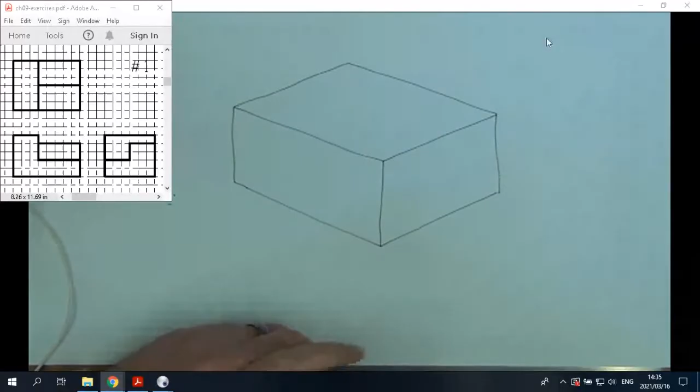So, isometric sketches exercise 1, number 1. I drew the block and now I'm going to cut out the top portion of this block. So it should be slightly more than halfway. Something like that.

Now, obviously, if you can see what the final part should look like in the isometric, then you don't have to go and do this whole cutaway method. This is just for people who are battling to see what it should look like. Okay, so there I removed that little step.

Now, if we view the right-hand side, we can see there's a 3 wide, 2 high block cut out here as well. But now the question is, how deep is this cutout? So to get that information, I have to go to the other views. So if I go to my main view, if this cutout is over here, it can stop against this vertical line over here.

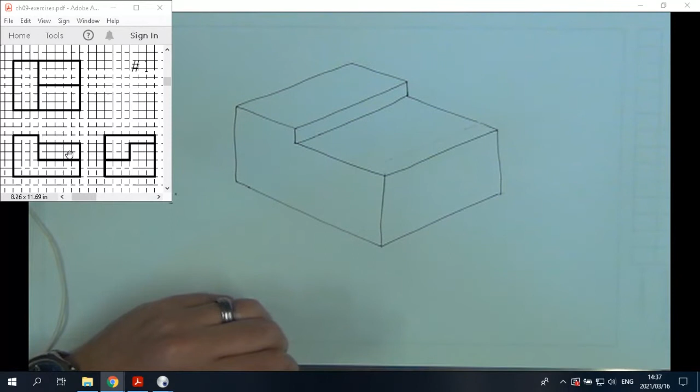I can also use the top view to see how deep this cutout goes to the back. If it was stopping anywhere other than that line, I would have another edge or line visible in my main view. So this block is cut out all the way to the end over here.

So the question now was, does the first edition and second edition have the same exercises in the drawings? Yes, they do have the same exercises.

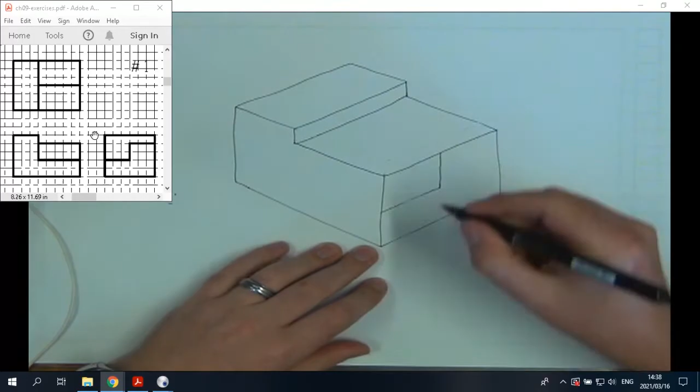Okay, so next we're going from this line's middle, somewhere there, going down 2 blocks, to the side 3 blocks. Now I'm just going to erase all the stuff that I don't need anymore.

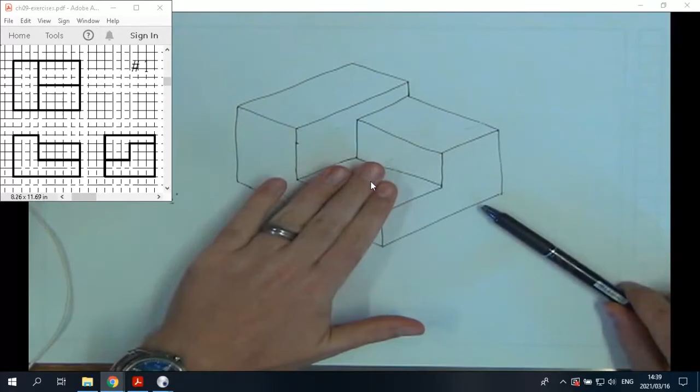Okay, so let us reflect and see if it makes sense. So this flat plane of mine, if I view it here from the right hand side, then that whole flat plane just becomes a straight line. If I can show it to you, like there's a cell phone and the top is a reasonably flat plane.

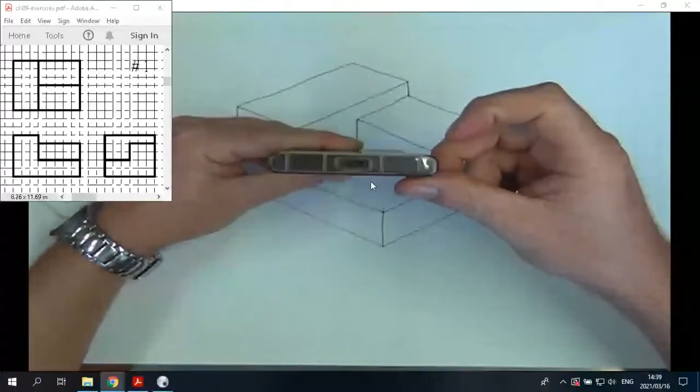Now, if you view a flat plane directly from the side, this top surface now from a flat plane simply becomes a straight line. So that's why this flat plane of ours, if we view it here from the bottom right hand side, it is simply represented by that line in the right hand view over there.

So if I tilt the flat line and view it straight from the side, then the surface just becomes a straight line.

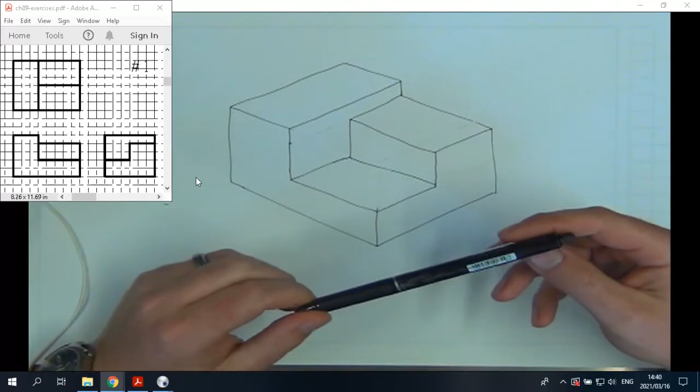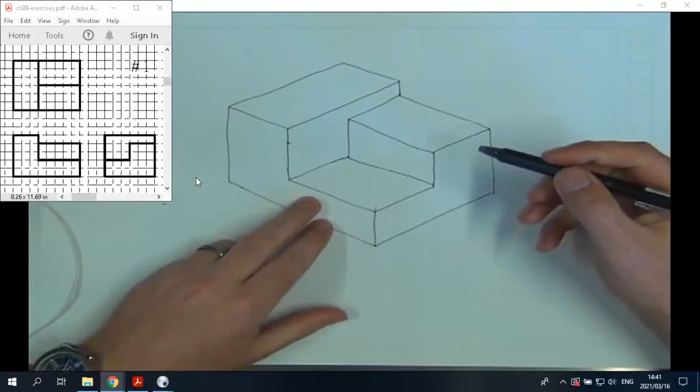Okay, so from the top, this rectangle will be represented by that rectangle over there. This next rectangle, that one there, from the top will be represented by that little rectangle over there. This big rectangle over there in my top view is then just that one there.

I'm glad you came right. So it seems refreshing does work.

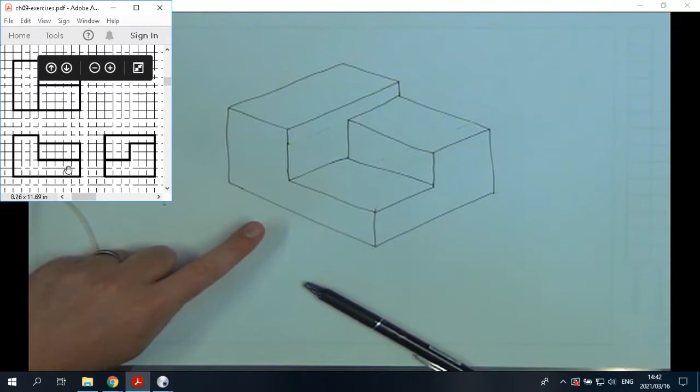Good. If we view it here from the front, the first thing we encounter is this L shape over there. So in my front view over here, we see the L shape. And then as we move further back from there, we get this rectangle over there, which is in my isometric view, it's that one over there.

So now we can see that this isometric drawing of mine does actually correspond to that orthographic sketch in the question. So this is then the answer to this problem. I'll leave it on there like that for another minute for the students who want to copy it down to be able to do so.

Okay, that's a good question. What speed should you do an isometric at in a test environment? So typically a semester test in MGC will be a 3-hour long session where probably a quarter of the time can be spent on the isometric drawing if you proportion the time and the marks linearly. So a quarter of 3 hours would then be 3/4 of an hour.

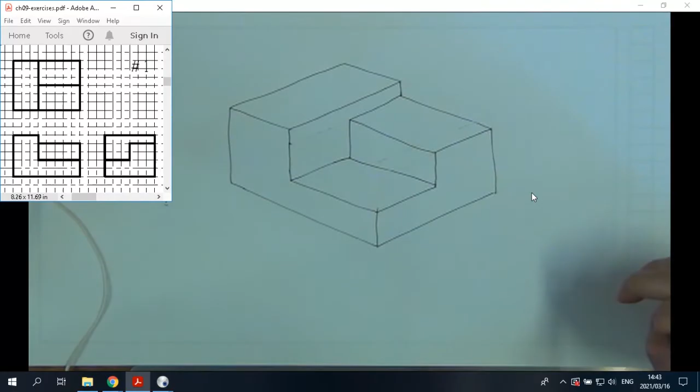So for the first semester test, if you do half an hour on the isometric, you'll be fine. What about center lines? So this drawing does not have any center lines because there aren't any arcs or radii in it. So this one looks just like that.

Okay, the next one is exercise 1, number 3.

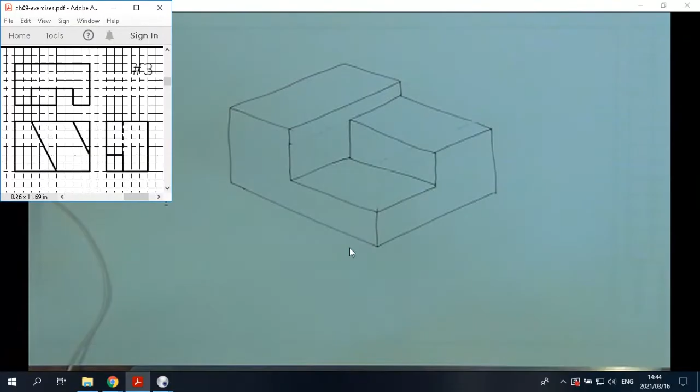Good, isometric sketches, exercise 1, number 3. This time we have a main view, a right-hand view, and a top view again. Main view has a height of 1, 2, 3, 4, 5, 6 blocks, and a length of 1, 2, 3, 4, 5, 6, 7, 8, 9 blocks. So it's about 1.5 times as long as what it is high. The right-hand view has the same height of 6 blocks and a width of 1, 2, 3, 4, 5 blocks.

The next question was, should you use different colored lines? Please don't. We just get pencils in kind of like a dark grayish black color. Don't use other color pencils, please.

Okay, next one is this one. Let's see if we can quickly draw it. So we have a view on this side that's more or less 30 degrees. There I have my isometric box. Next thing we need to do is we need to try and figure out what this thing would look like.

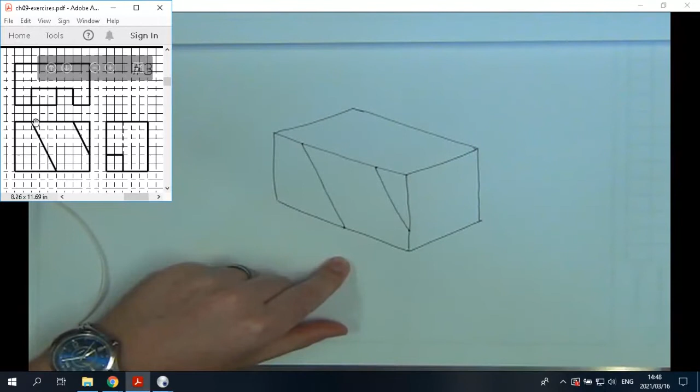Then in my top view, I saw that this corner has a line going to the back. That would be that line over there. Line to the back. With a length of 2 blocks. So just something for interest, if that is 2 blocks and that is 2 blocks, then it means that this point must be directly above that point.

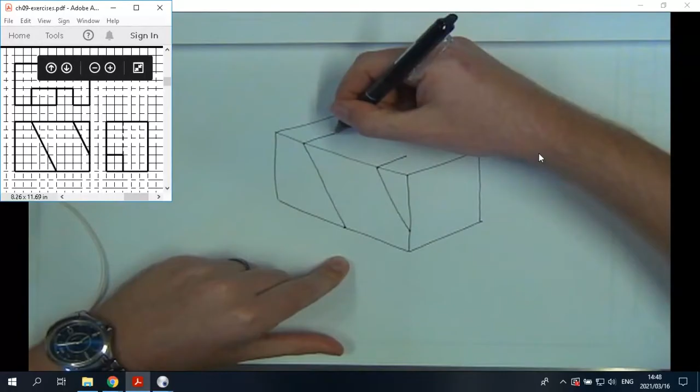Then I've got a straight line from that corner to that corner. Straight line from there to there. Good. Then I also saw that there's a straight line going back 2 blocks from this corner, so something like that. And now I'm kind of stuck with the information of the main view. I have to now use information from the other views.

So from my right-hand view, I can see that there's a little 2x2 box that either is protruding out or is cut in. So that corner over there lines up with that corner caused by that line there, which means it can look something like that. So there's the 2x2 box that is cut away. So now I'm just going to erase the stuff that I don't want there anymore.

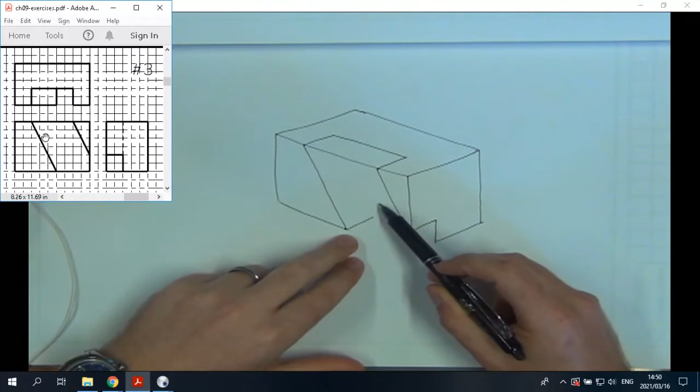Okay, good. Now we need to finish this drawing so that it makes sense. So I have somewhat a flat plane over here, but at the moment my flat plane isn't completely sketched because it's open on the one side. So if I view in my top, I've got this little rectangle over there that is 2 blocks deep from the top line to the bottom line. So 2 blocks deep. From the top line to the bottom line.

And then we also have this plane over here, which is this one in my main view, which at the moment isn't completely drawn yet because it is still open at the bottom. So to close that off, I need to do that. And that is basically the isometric drawing in this question.

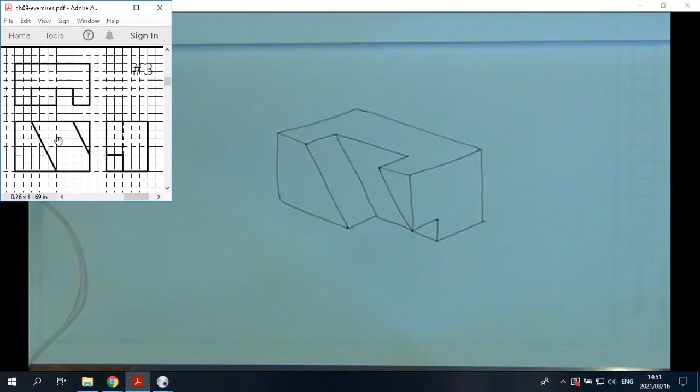Let's have a look. If we approach it from this bottom left-hand side, we have this shape over there, which then corresponds to this shape here in my main view. Over here we have the little triangle like that, which then corresponds to that triangle over there.

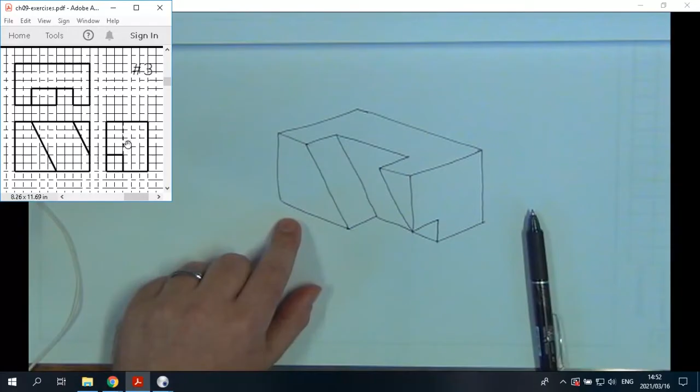If we move it a little bit further back, we have this shape over here, which goes from there to there, to there, to there, to there, which corresponds to this shape over here. And if you look very carefully, you'll see that there's a dashed line over there. Let me zoom in a little bit for you.

So that dashed line represents somewhat the plane which is behind the part that I'm looking at, which is basically this flat plane that lies behind this edge over here. So the dashed line represents the hidden detail of this flat plane.

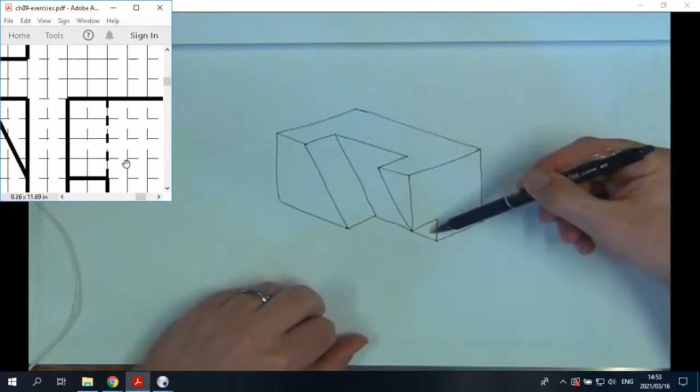Good. Oh snap, I shouldn't have clicked there. There we go. Okay, so

The question says, did you take into account the solid line on the top view? The top view, I'm not sure what solid line you are referring to. But basically, this plane over here is represented by that line over there.

Okay, I'll leave this one on there for another minute or so for the people who are still busy drawing it so that they can complete the drawing.

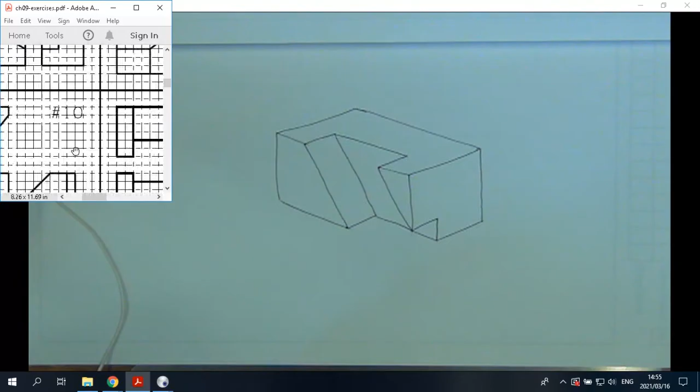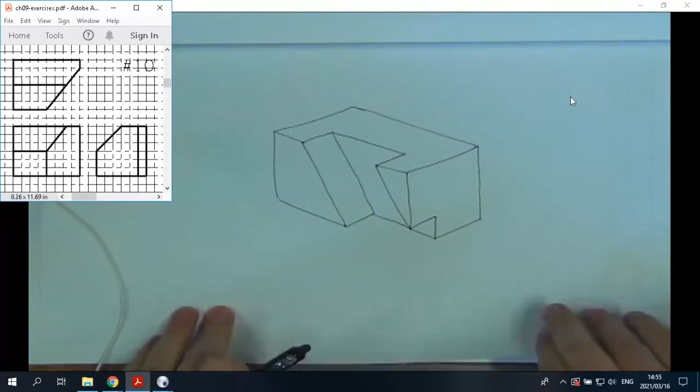Okay, so the next one we are going to have a look at is exercise 1, number 10. So isometric sketches exercise 1, number 10. We have 3 views given. There's a right-hand view, there's a top view, there would be the main view. And in my top view, I have this bottom triangle cut away. In my right-hand view, this top left triangle is cut away.

The length is 1, 2, 3, 4, 5, 6, 7, 8 blocks long, 6 blocks high, 6 blocks deep. So the right-hand view is a square, this view is not a square. Okay, something like that. That's our box. And now we can start to remove material.

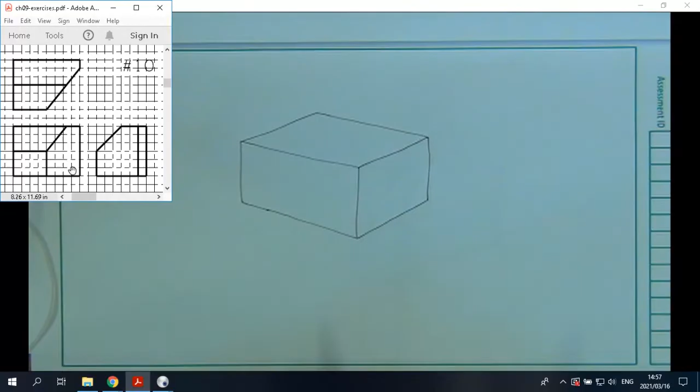So I'm going to start by removing this bottom corner in my top view, that one over there. So it starts 1 block from there and is about halfway in that line. Okay, something like that.

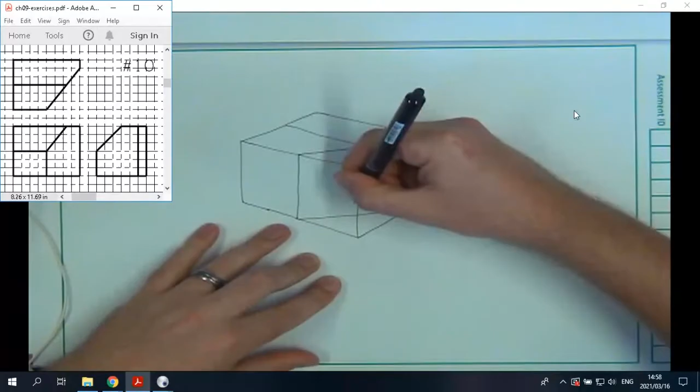Next thing that I'm going to do is I'm going to remove that triangle from my right-hand view, the top left triangle, which is 3 by 3, so it's middle of that one to the middle of that one. Something like that. Now for the slightly more tricky part. I'm going to erase the construction lines there.

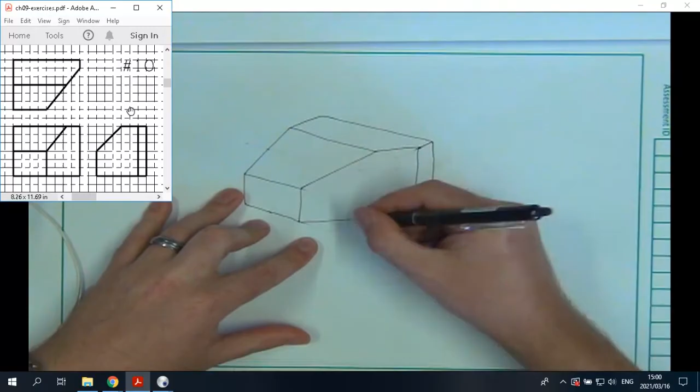Okay, so now for the tricky part that I mentioned. This plane over here is flat because that line in my top here is a straight line. So that means it cannot have this weird shape over there. It should just have a straight line from that corner down to that corner. You can see there it is a straight line. So it should have a straight line from this corner to this corner. Something like that.

So if we now approach this drawing here from the bottom left, the first thing we meet is this rectangle that is 4 blocks by 3 blocks. Then if we go slightly behind that, at the top we have a block that is 3 at the bottom and more at the top. About 6.5 at the top. To the right of that, we've got one that is 3 at the front and full height at the back.

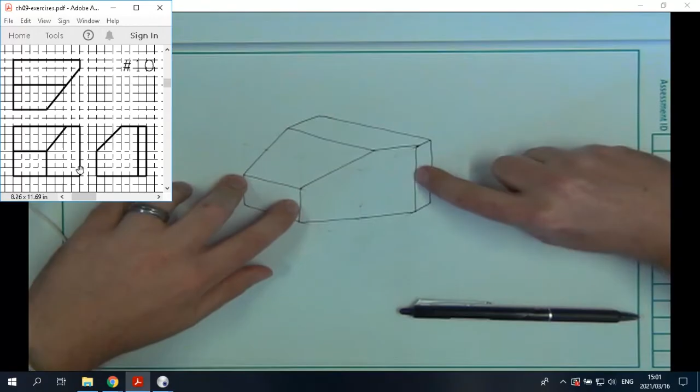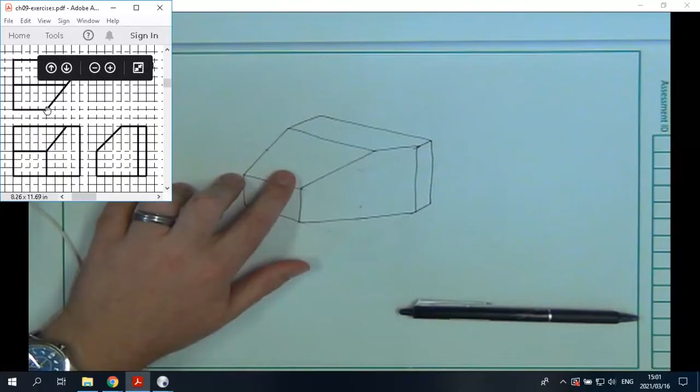And this one is the first one we see from the top. If we go down from the top, the second thing we see would be that face over there, which is this one. This entire face would not be visible from the top. It would just be a straight line. That straight line there. And then from the right-hand side, the first thing we meet is this slender rectangle. And behind that, this shape over here.

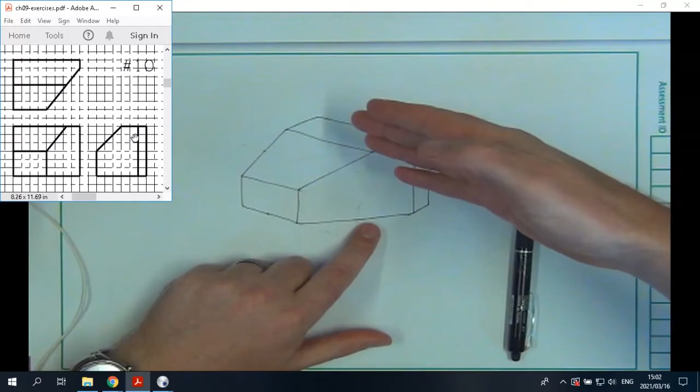Now the reason why this line seems longer than the 2 blocks given in my right-hand view is because it is actually going into the page. Meaning, if this is my pen's length, if I turn the pen, it actually looks like a shorter pen because I'm not looking straight at it. So this line is longer than 2 blocks in reality, although if you view it from the specific angle, it only looks 2 blocks long.

Okay, I'll leave this one on there for another minute for the people to copy it down.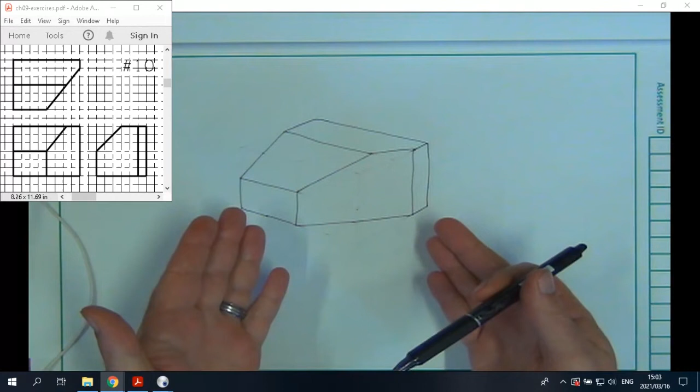So there's a question now on where can you find the memorandums for all of these questions. So you won't be able to find the memorandum for all of the exercises in the book because then we can't use the book anymore. It's basically just discussed in class.

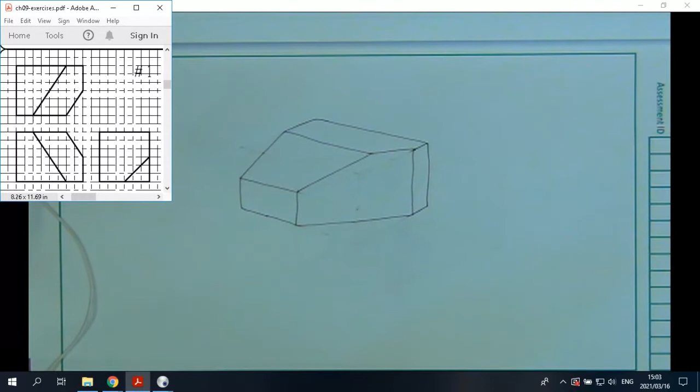I see someone has raised a hand. You're welcome to ask a question by typing it in the chat box.

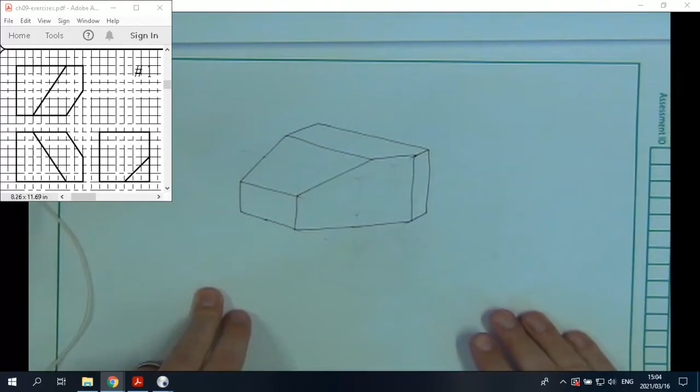Good. So the next one we're going to have a look at is isometric exercise 2, number 1. So exercise 2, number 1. We're given a part that is 1, 2, 3, 4, 5, 6, 7, 8 long, 1, 2, 3, 4, 5, 6 high, and 6 deep as well. So let's quickly construct the box.

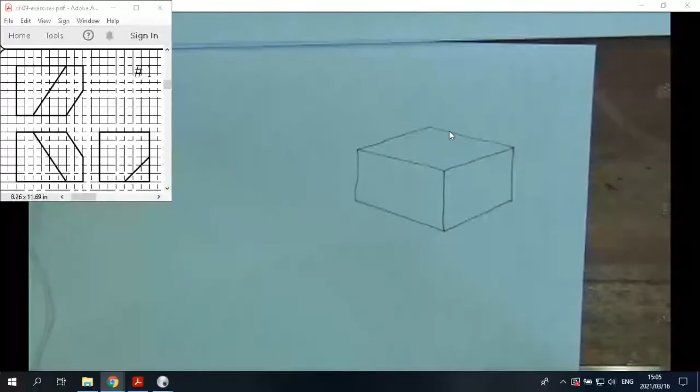So there we have the box. And now this one is a little bit more tricky than the previous ones because we can use a cutaway method, but the cutaway is at a very weird angle, which makes it very hard for us to do that slanted cutaway. So I'm going to show you another method in which you can construct these weird surfaces.

So I'm not sure how to answer the question about the curve like a building wall. That plane on the right hand side is basically straight for the previous question.

Okay, so with this one, what I'm going to do now is I'm going to sketch what I have available, and then I'm going to use that to construct this weird shape over here. So first thing to do would be to identify corners that match with each other. So find a point in one view and find its location in the other views as well.

So for isometric drawings, we're not going to do auxiliary views. This is just a single 3D view. Auxiliary views would be helpful later on if you want to know the true shape of that weird surface. But we're going to do that in auxiliary views that we do in about 3 weeks' time.

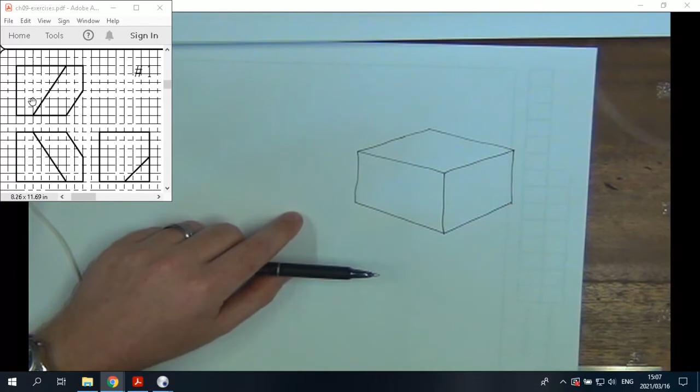So let's start with a corner. I'm going to start with that corner over there. That corner in my other views, basically what I'm looking for is any intersections or kinks in lines. So if I project this one upwards, the only one that intersects with that projected line is this corner over there.

Just for ease, I am going to quickly draw the question over as well. And this view will now nicely crash into this view. So I'm just going to do it slightly higher. Snap. Bad planning, guys. Okay, something like that. So there I just quickly copied over the views.

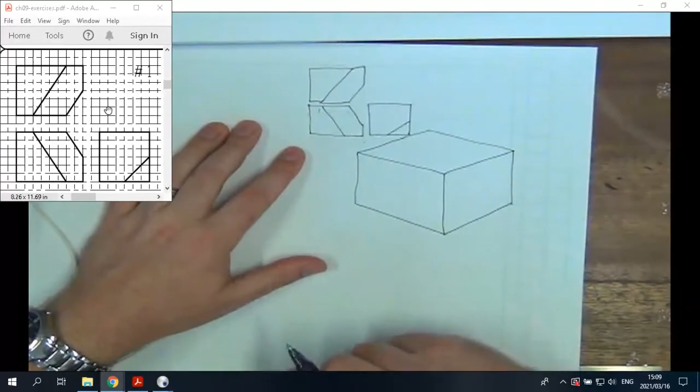So if I start with this point, let's give it a number. Point number 1. If I look at my top view, I must try to figure out where point number 1 can lie. The only place that lines up with this line projected upwards is this corner over here. So that's point number 1 in my top view.

Point number 2 here at the bottom. If I project it upwards, the only place that can line up with that is, well, now I have 2 options. It can be that one or that one. So for that, I'm going to use my right-hand view as well. Point number 2 to the right can lie over there, or over there.

So if I now look at these 3 points and these 2 points, I need to figure out which of these could actually be point number 2. So point number 2 has to lie somewhere on the ground. This point, however, is somewhere in the air. It's at the top there. So this one cannot be point number 2. That one has to be point number 2.

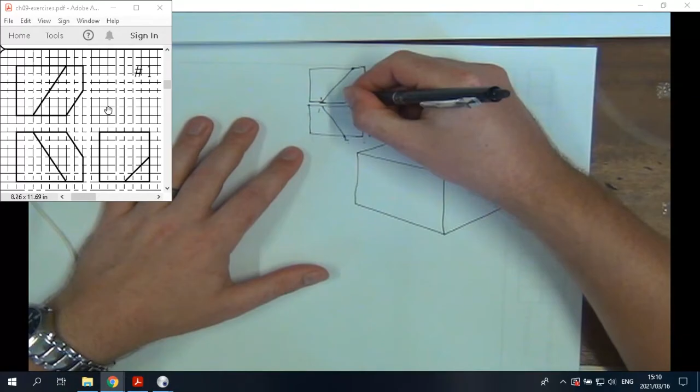Then let's do point number 3. Point number 3 in my top view can only line up with that corner or the bottom one. Now I'll have to go to my right-hand view to figure out which of those it can be. There's a trick with orthographic projection. It's not too serious for you to understand it right now. We are going to do it in next week's lecture as well.

Point number 3 in my right-hand view can only be the one on the ground. So that means point number 3, I said could be that one or that one. In reality, it can only be the one on the ground. Okay.

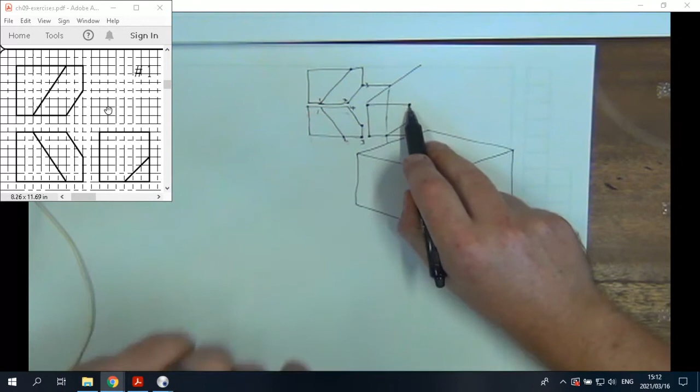Let's call that point number 4. In my right-hand view, point number 4 could line up with that corner, or it could line up with that corner. So it's hard to say from my right-hand view only. If I take it to the top, point number 4 can be there or there. So one of these two or one of those two, there can only be one answer there.

Previously, we said that this point number 2 lies on the ground. So the only other option for point number 4 would be that one there, because this point 4 definitely does not lie on the ground. Okay, so that's point number 4.

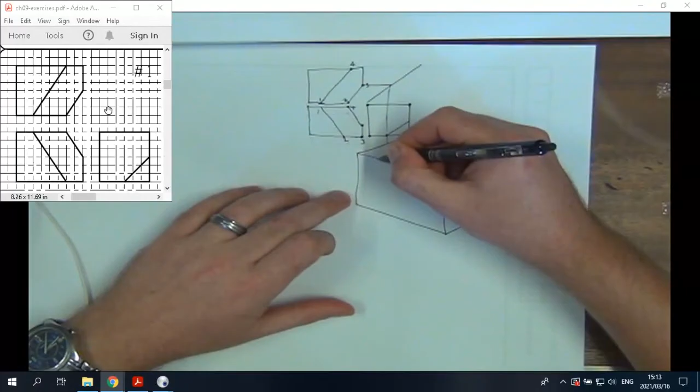Now I'm just going to transfer these points over to my isometric view. Point number 1 from my main view lies over there. From my top view, point number 1 lies on the same place, 2 blocks from the side. Point number 2 in my main view lies over there. From my top view, it is 2 blocks from the side.

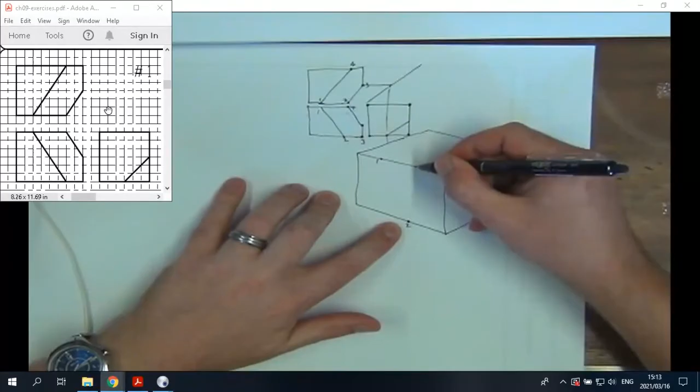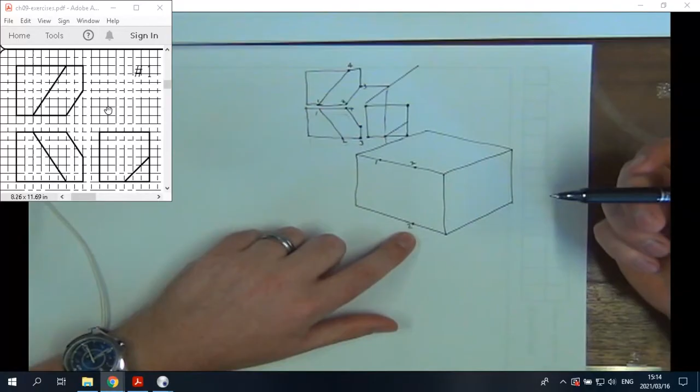Two blocks from the side. Now the question is, which one of those is point number 2? And I usually explain this by referring to a fish tank. I always use this fish tank example. Basically, if you're at an aquarium and you're looking at a fish tank, and we have some other fish in there.

Now we can measure the distance that the fish is from the bottom of the tank, and we can measure how far it is from the side of the tank by just looking at the tank from the front. But what we can't see is how deep this fish is into the tank. So basically how close it is to the window or how close it is to the back of the tank. The only way in which you can get this information is actually by walking to the side of the tank and looking at the side of the tank.

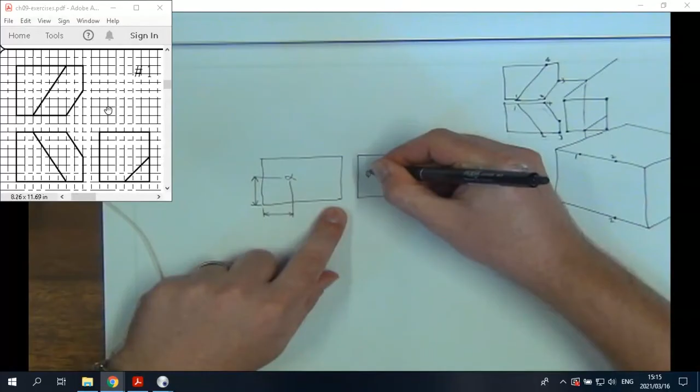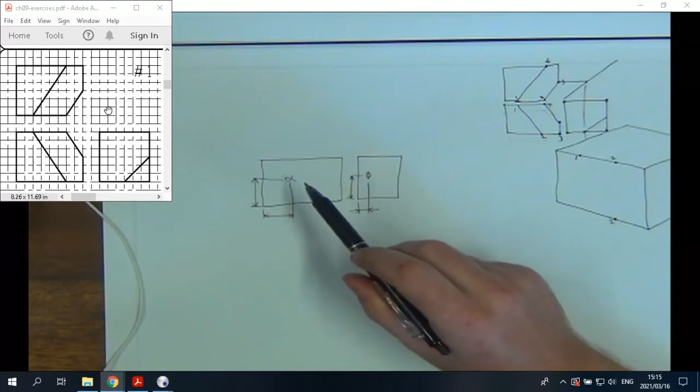And only now can we see how far this little fish is from the front window. Okay, and remember the height from the bottom will still be the same as the other one. So basically what I can do is, if I want to draw this fish tank in 3D, like an isometric view, and I want to find the location of this fish in 3D, I can draw the tank.

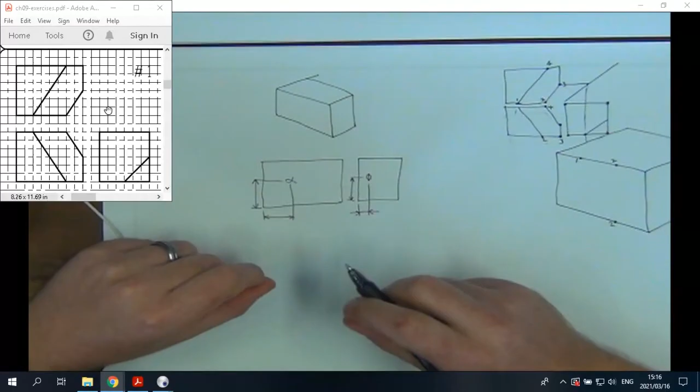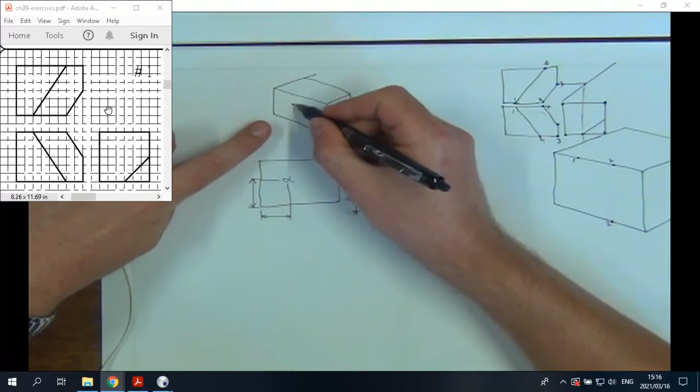And then what I can do is I can project the position where this fish should be in my isometric by taking the point on the main view, the distance from the side, the distance from the bottom, taking that point, and basically saying that the fish from this view looks like it is there, but I cannot judge how far into the tank it is. So it can be anywhere located on that line, because from this one direction, you don't have that information.

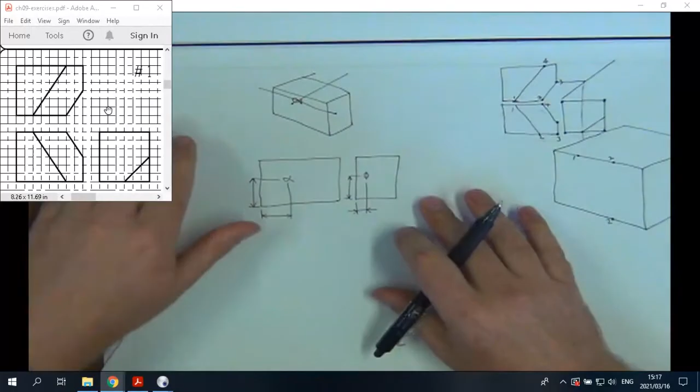Now we can do the same from the right-hand side. The fish looks like it is over there, but again, because it's a 2D view, it can be anywhere on that line projected to the back. And where these two lines intersect each other, that is actually the point where the fish would lie in the fish tank. So basically, you take the one plane, project it backwards, take the other plane, project it backwards, and where those two lines intersect, that is where you will actually find the point.

Now, the reason why I explained it like that for you now is point 2 in my main view lies over there, or it can be anywhere behind that. In my top view, it looks like it's over there, or anywhere below that. Those two lines intersect at the bottom there. So that is point 2 in my isometric view.

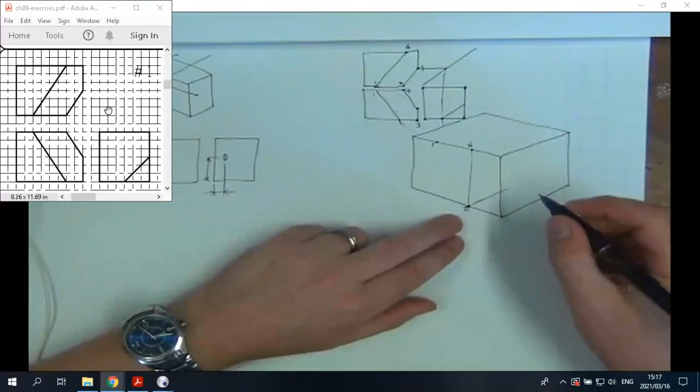Point number 3 in my main view looks like it is over here, or anywhere behind it. In my right-hand view, point number 3 is over there, or anywhere behind it. In my top view, point number 3 is over there, or anywhere beneath it. So where those three lines intersect is where the true location of point number 3 can be found.

Point number 4 is in my top view. Top view, it looks like it is over there, or anywhere below it. In my front view, point number 4 looks like it's over there, or anywhere behind it. So this is the true location of point number 4. Okay, and then if you follow this process for point number 5, and so on, then you can actually construct the isometric drawing.

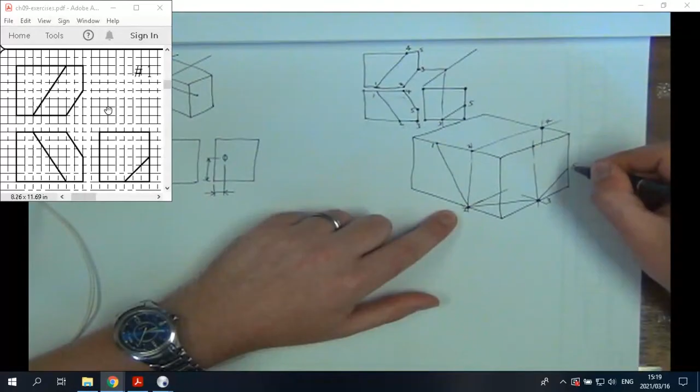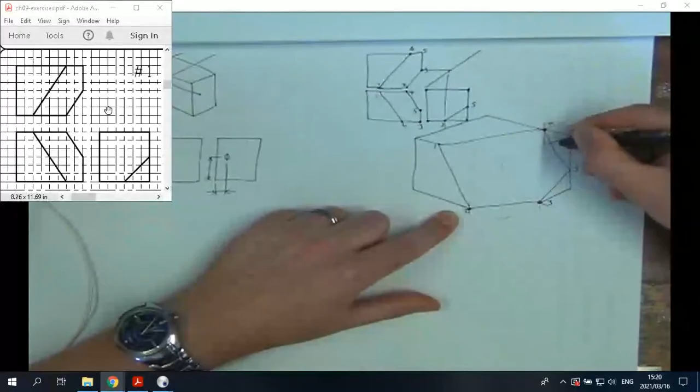There's a straight line from 1 to 2, straight line from 2 to 3, straight line from 3 to 5, straight line from 5 to 4. And a straight line from 1 to 4 as well. So if I quickly go and erase all my construction stuff, then that is what we are left with, and that is the answer to this problem.

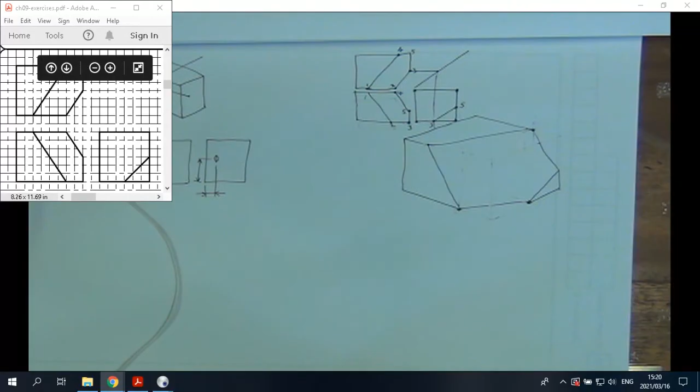It's a pleasure. It's my job. For all of you saying thanks and whatever, okay, it's a pleasure. It's my job.